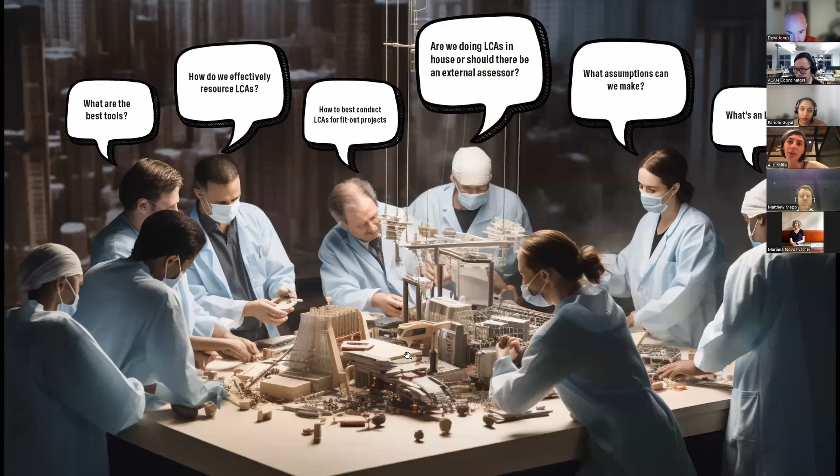We are looking to do this by creating an open and sharing network, which is what brings us here today. So today is the second session of our recently launched campaign called Carbon Clinics. Through this campaign, we are bringing together industry experts who will share their knowledge, experience, and woes in the adoption and implementation of conducting whole life cycle assessments in their respective organizations. The aim of the campaign is to bring practical insights and foster greater dialogue between us during the process and towards better standards and consistency in this world of WLCAs.

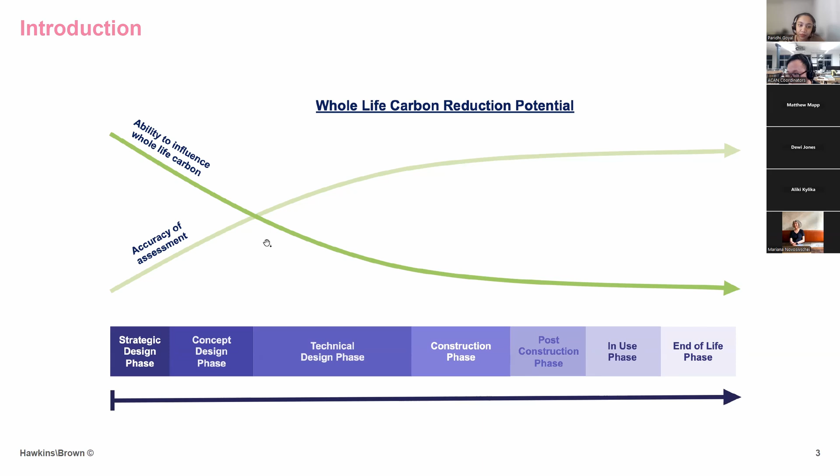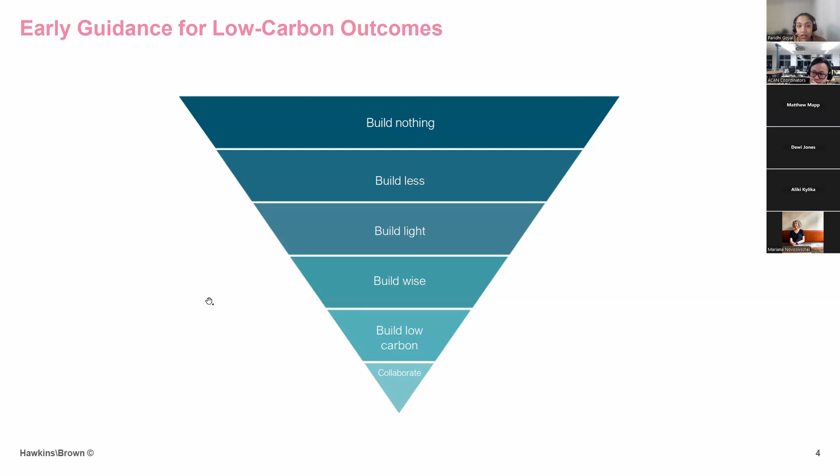At the start of the project, the largest carbon savings can be made through optimizing the brief. So we start with build nothing - do we need to build something at all? Build less - is the brief spatially efficient? Can we use a building or a material that already exists? Is the proposal refined enough? Build light - can we reduce the material volumes by adjusting structural loadings or grid sizes? Build wise - can we minimize materials, balance upfront carbon impact with longer-term replacements? Build low carbon - have we discussed and chosen a low carbon material palette? Build collaboratively - ensure the whole team is involved in designing, delivering, and operating a low-carbon building. Share information openly and be transparent.

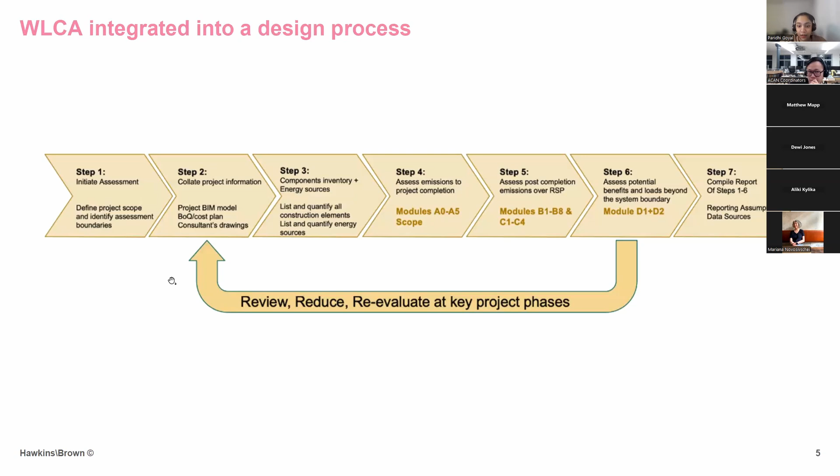The best practice WLCA process should be integrated into project and cost planning from the beginning rather than waiting for a final report. Teams should use WLC data at key decision points. Running a partial WLCA early, just for structural options for example, helps compare materials and designs before making big commitments. The earlier we assess, the more opportunities we have to make meaningful carbon reductions.

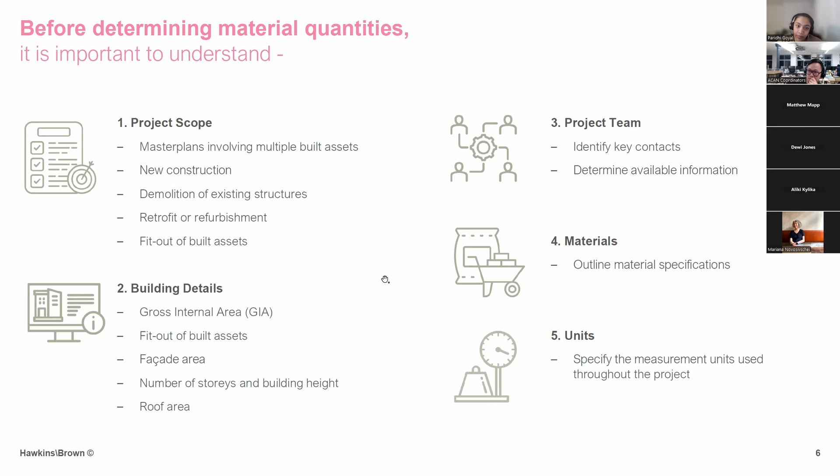Before we start measuring any of the material quantities, we need to get a few things straight. So what is our project scope? Is it a new build, retrofit, or a master plan? What are the building details? What's the GIA? How big is the facade? How many floors are there in the building? Then what are the team roles? Who is providing what data? What are the material specifications? What do we already know and what's still an assumption? Standardized measurement units - consistency is very crucial. For example, if the steel quantities are measured in tons, that unit should be used throughout the project to maintain data integrity.

Before we can calculate carbon impacts, we need to define a few boundaries. Are we measuring upfront embodied carbon or whole life carbon? Which data sources are we using - is it generic or is it manufacturer specific? What units are the carbon factors in? Because having that consistency is key. And don't worry if these terms sound a bit technical at the moment, we'll go over them in more detail shortly.

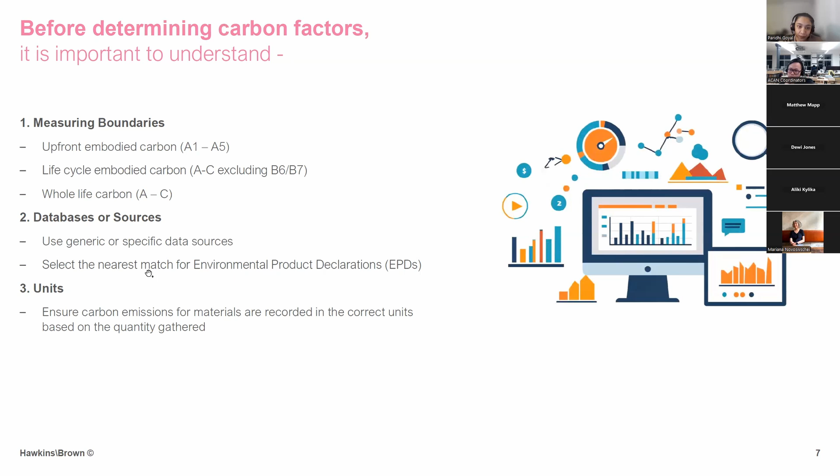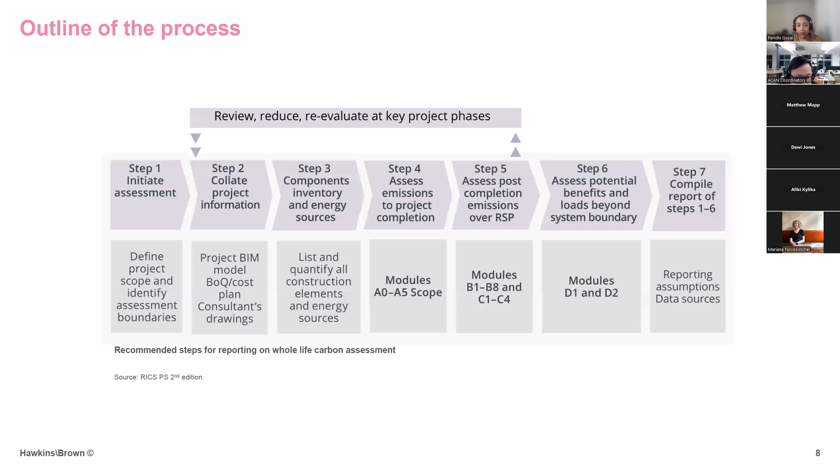The whole life carbon assessment process follows a structured methodology aligned with RICS professional standard second edition. The first step is the initial assessment, which defines the project and project scope. Then step 2 is collating the project information, be it via project BIM model, BOQ, or cost plans. Then we go to components, inventory, and energy sources, and listing the quantities. Then there's assessment of the project till completion, and from there we start with our carbon assessment from modules A0 to C. After that, we have step 7, which is reporting.

So how do we set carbon targets? There are several industry guides we can use for benchmarking. RIBA 2030 Climate Challenge sets out targets, actions, and methodologies. LETI provides detailed guidance on low carbon design, and we now also have UK NZCBS, which is the newest standard. These documents give us a good starting point for setting performance expectations.

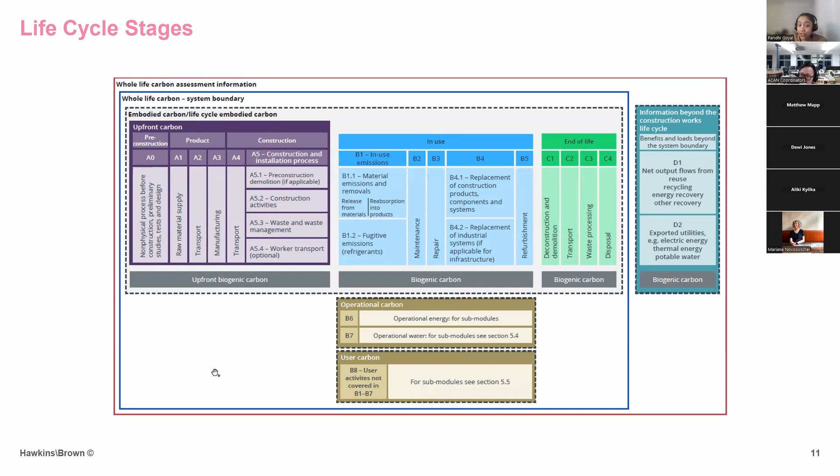Now we'll discuss the initial considerations before conducting an LCA. The project lifecycle stages outlined in the RICS Professional Standard Second Edition are based on the modular structure established in standards such as EN 15978. I'll delve deeper into this module in the upcoming slides.

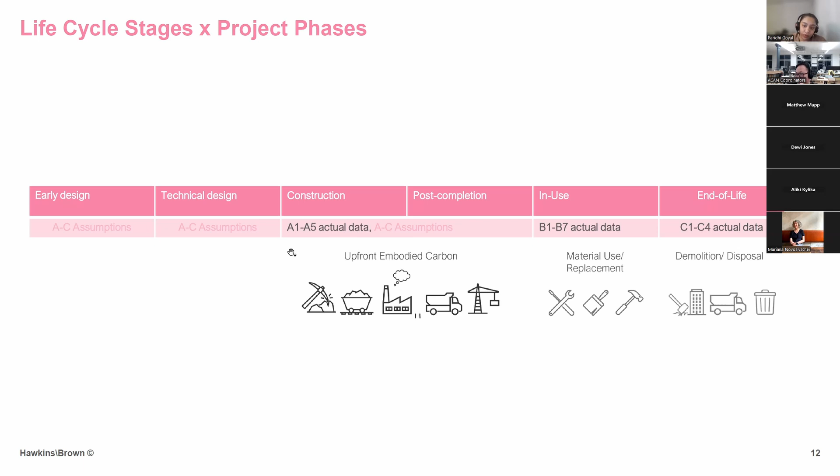As the project progresses, our WLC estimates become more refined. During the early design phase, A to C are largely based on assumptions. As the project progresses, the information becomes more refined, and by the construction phase, you have actual data for A1 to A5 and so on.

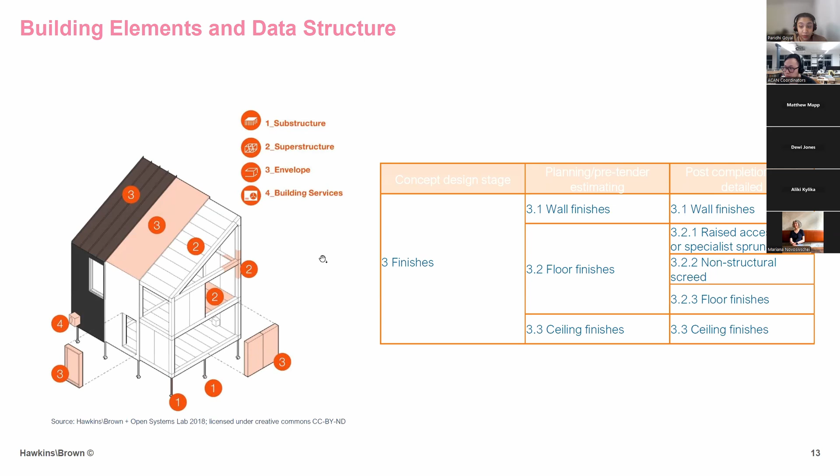All buildings are made up of different elements: substructure, superstructure, facades, services, finishes. As the design progresses, we get more detailed material breakdowns. By practical completion, we have the most granular data, as you can see in the table on the right.

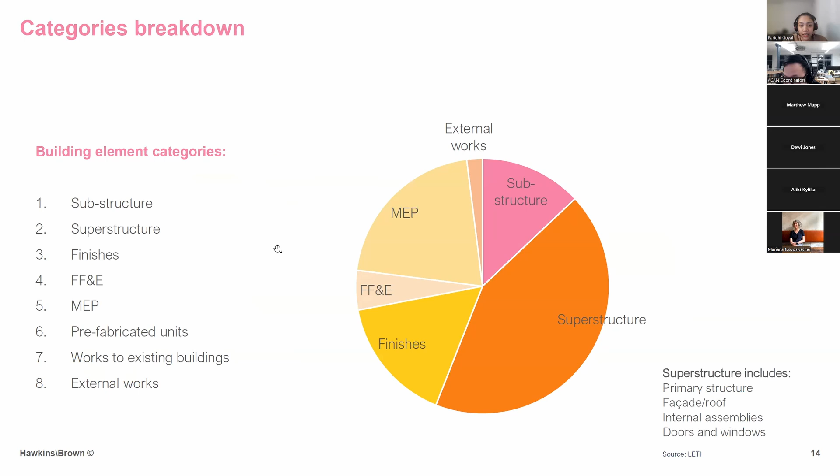The reference study period is the time frame we use to assess the in-use emissions while the building is in use. In the UK, the standard is usually 60 years, but in some European countries it's also 50 years, so be careful when comparing international data.

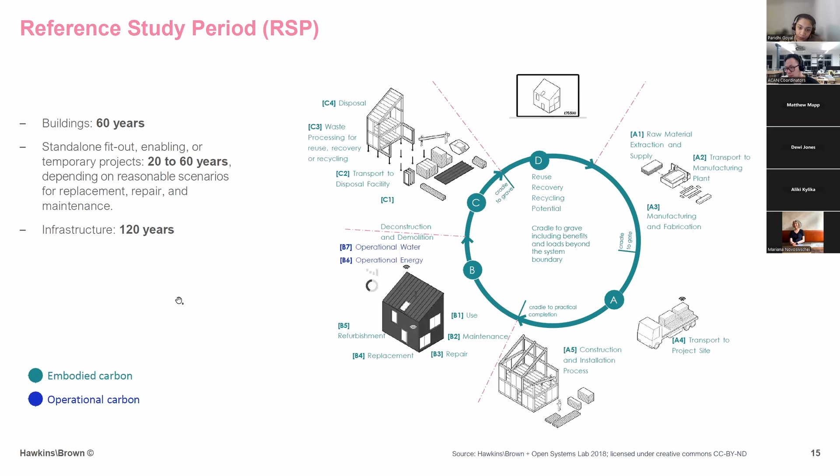When collecting material quantities, BIM models, BOQs, and QTOs are the key data sources. We'll go into more detail about these in the upcoming slides.

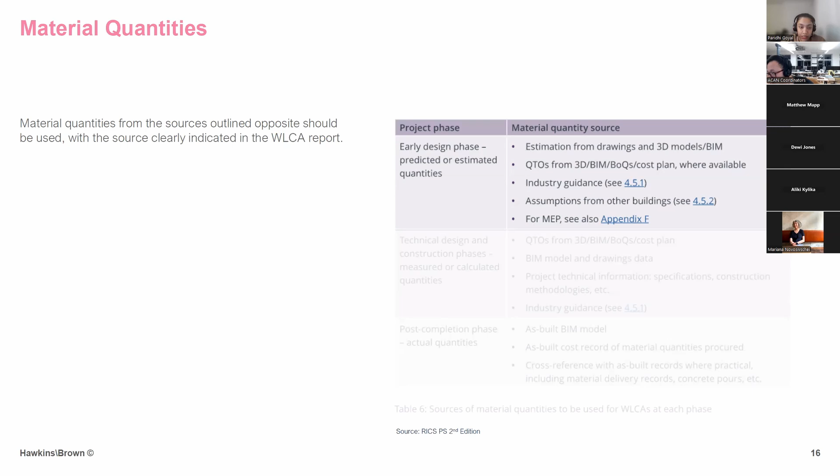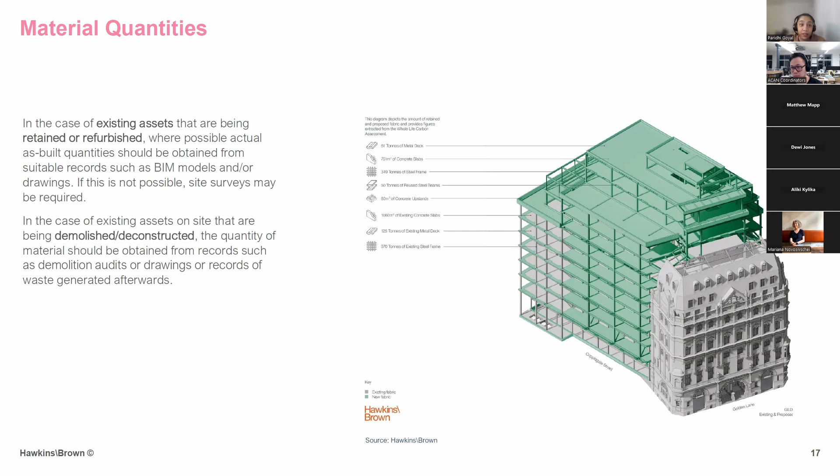If there's an existing building on site, it's important to take this into account as early as possible and try to get hold of some as-built quantities. You should talk to your project manager or client and get the pre-demolition audit commissioned, as this will give you a fairly accurate representation of the material quantity and specification, and will also be useful for any circular economy assessments you may need to do, if it's GLA referable, for example.

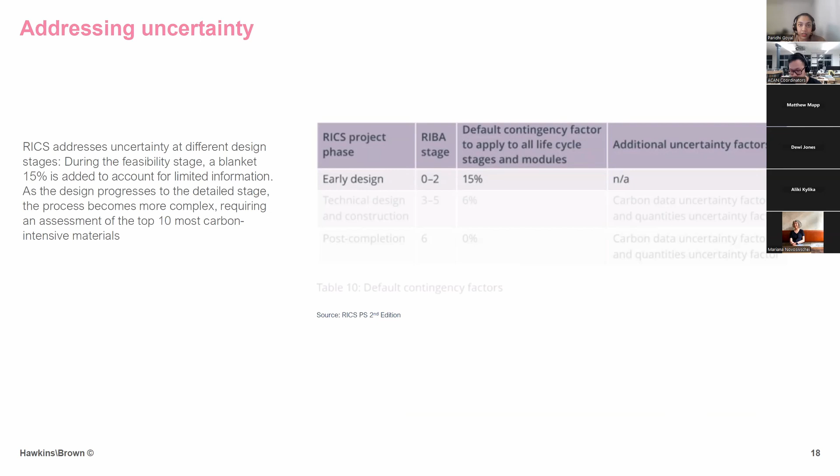In an early stage assessment, we don't have all the details yet, so RICS accounts for this by adding a 15% buffer during the early stage assessments. As the design progresses, this uncertainty changes, and it is refined by focusing on the top 10 most carbon-intensive materials.

Another key aspect of calculating carbon is the use of databases, which fall into two categories: generic, like ICE, and supplier-specific, like the EPDs.

The generic data is material-based, not product-based, and so is preferable to use at the early design stages. The commonly used free and generic database is the ICE, that is Inventory of Carbon and Energy by Circular Ecology. This gives us the data for A1 to A3 only, which is just the manufacturing of the material.

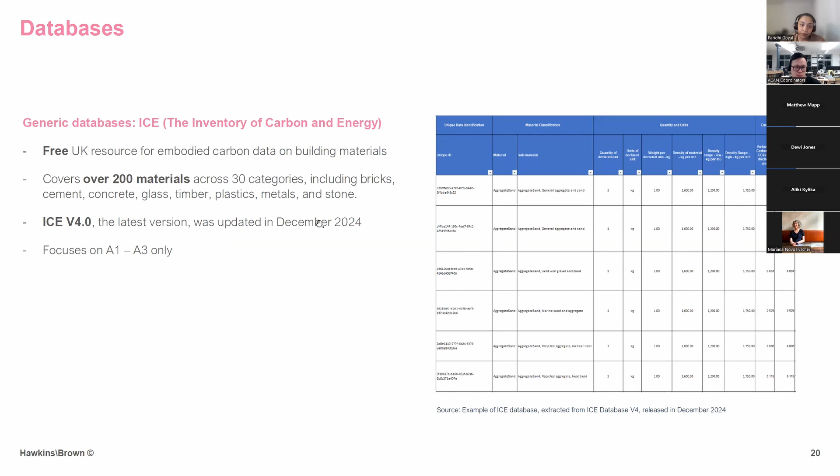When carrying out the LCA, environmental product declarations, or EPDs, are the key sources of data. There are a few different types of EPDs, each with different levels of specificity. First, we have collective EPDs, which are industry-wide and represent an average across multiple manufacturers. These are useful in early stage assessments when you haven't yet specified a particular product but need a general understanding of material impacts. Then there are manufacturer-specific EPDs, which provide data for a particular brand, but may still cover a range of similar products rather than a single one.

Finally, the product-specific EPDs are the most detailed, covering a specific product from a specific manufacturer. These are most relevant at the later stages when you've made a final material selection and need the most accurate carbon data for your LCA.

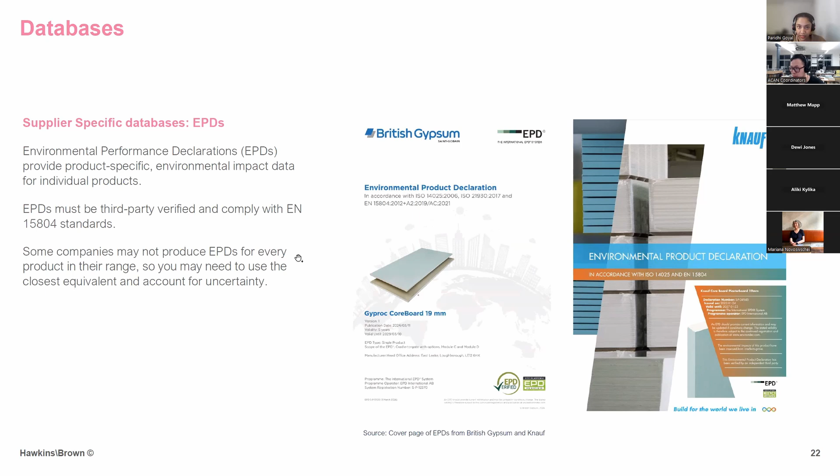These EPDs must be third-party verified and comply with EN 15804 standards. Some companies may not produce EPDs for every product in their range, so you may need to use the closest equivalent and account for uncertainty in the early stages.

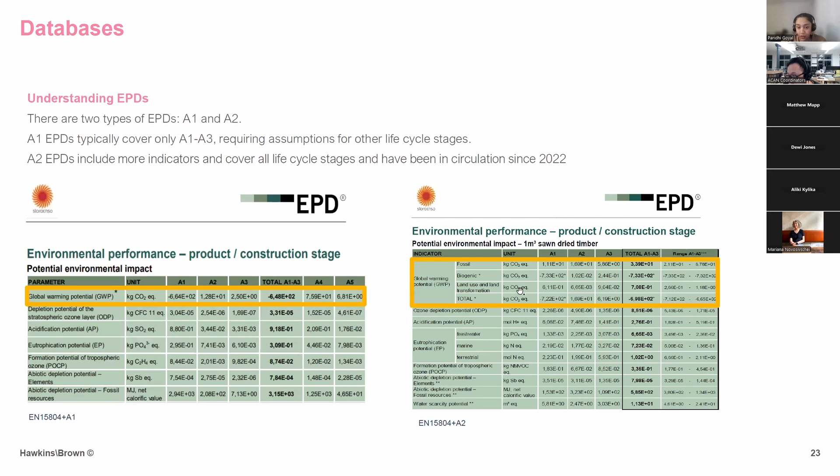EPDs can also be classified as A1 and A2. A1 EPDs typically cover only A1 to A3, requiring assumptions for the other life cycle stages, while A2 EPDs include more indicators and cover all life cycle stages, and they have been in circulation since 2022.

When reviewing your EPD, we need to focus on the GWP. Even if the EPD includes A to C data, it's important that we consider the RICS default figures for early stages, as RICS has its own methodology and assumptions. Ensure that the declared units are aligned, and remember that EPDs are usually harder to obtain, so we have to talk to the manufacturers and stay in touch.

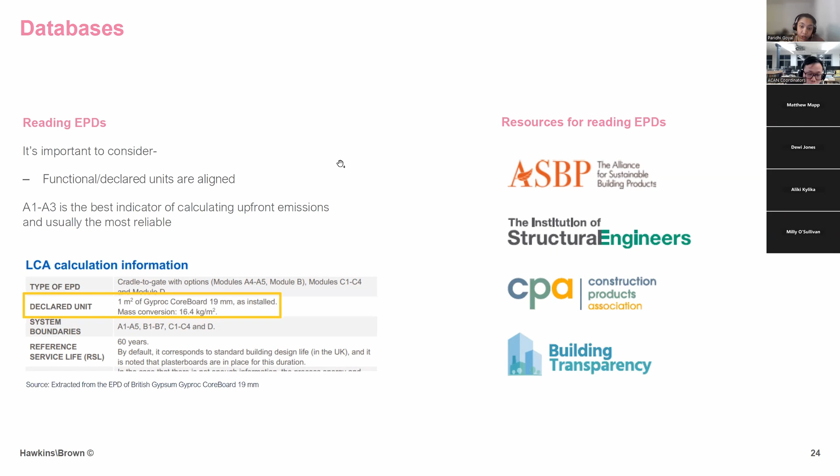On the right side are a couple of resources that can be used to understand how we can read EPDs.

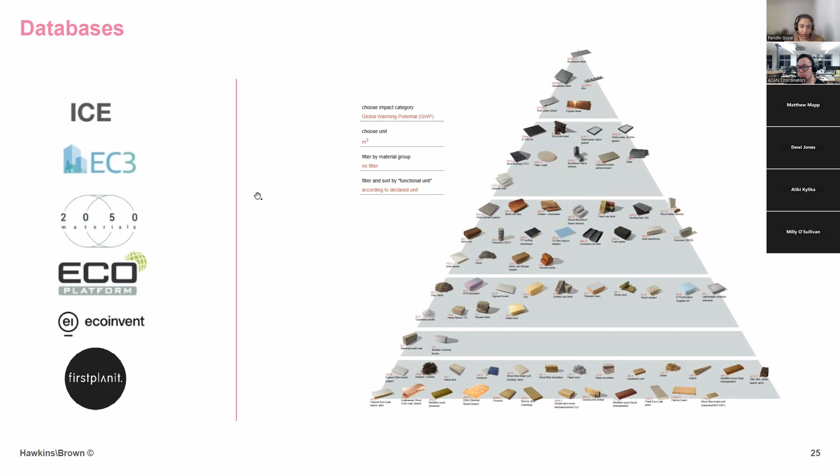Now we'll talk about early design phase inputs.

At the early stage, it's very important that we define the purpose of the assessment and conduct an optioneering analysis, which involves quick preliminary calculations about considerations we make during early stages, like typical structural bays. We also need to be aware of material carbon hotspots and identify key areas that could have a higher carbon impact, so we can start creating carbon reduction strategies accordingly.

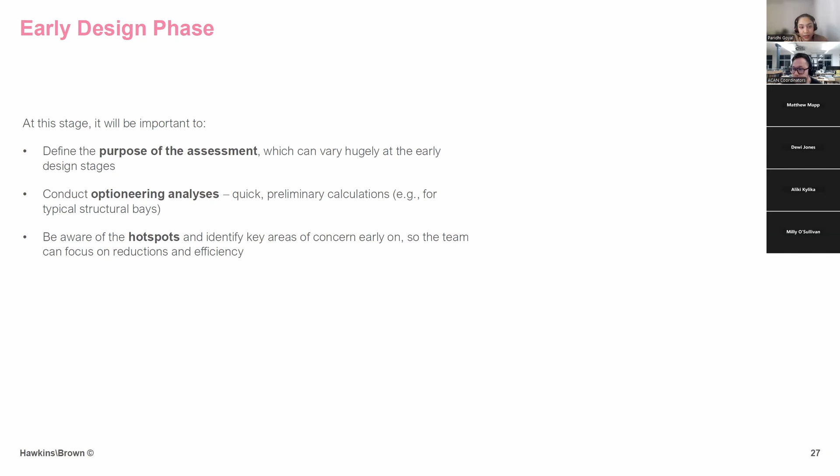Before we start the analysis, it's important to understand how we collect the data. The most common methods are RFI forms, which are request for information forms—I'll go into more detail in the next slide.

Then we have the Revit model, which provides detailed material quantities or takeoffs, usually in a spreadsheet format. The main advantage of using a Revit model is that it gives you precise quantities based on the actual model. However, if the model's components or assemblies are not accurate, the quantities might not reflect the real requirements, so it's crucial to cross-check the data with the BOQs for accuracy.

BOQs, or cost plans—when using these, ensure that all quantities align with the units you've assigned, as having that consistency in units is very crucial. Always review carefully and ask questions if needed, and go back to the BOQ consultant.

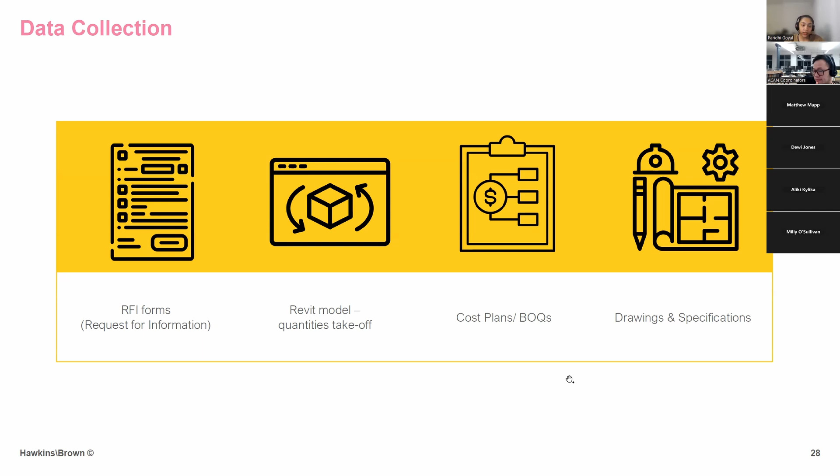Also consider the recycled content. Concrete and steel often have some, and the specification for that should be noted. All of these can be interrelated, so you can always cross-verify any information you've received from your Revit model with the BOQs, the RFI forms, or even with the drawing specifications you have.

This is an example of an RFI we use here at Hawkins Brown. An RFI can be issued to gather quantities from the relevant consultants.

You need to first identify consultants—usually the design team, landscape, MEP, structural and civil engineers—and determine the specific information needed for the analysis, including the data structure and preferred units. Establish the deadline for receiving the information to ensure the analysis can begin according to the project's timeline.

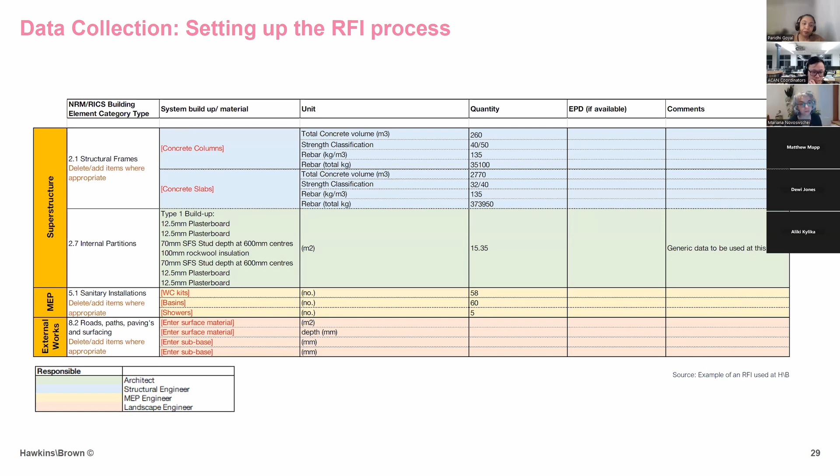At this stage, typically only structural strategies or facade buildups are available. So typical bay studies for horizontal and vertical grids should be conducted at concept stage for different material arrangements, to determine the impact on total embodied carbon for each framing arrangement.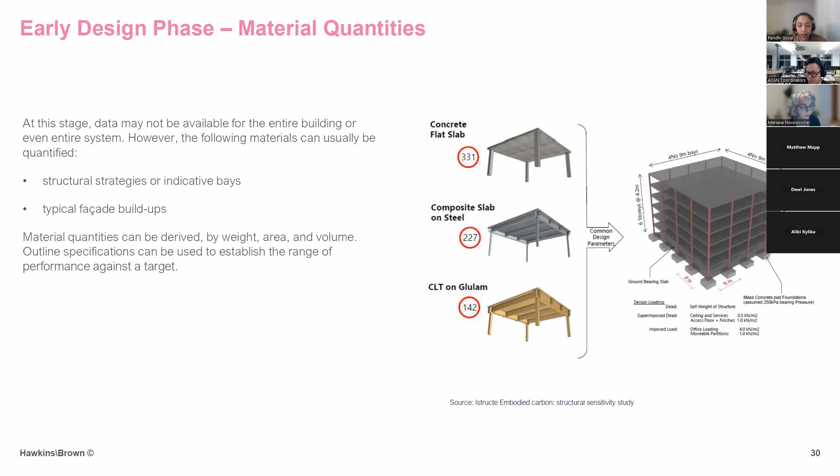Here you can see a typical office breakdown showing the impact of each element category. The facade has a significant impact, making it one of the elements that should be addressed early in the design phase. This highlights the importance of making conscious choices for facade elements from the outset.

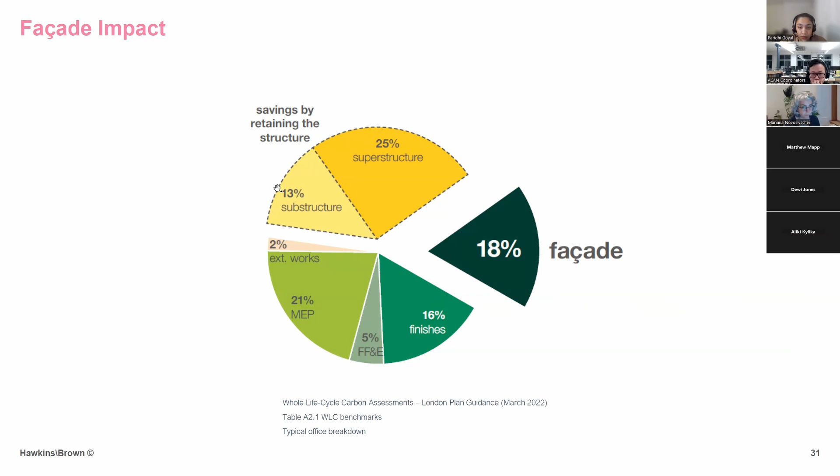So now let's look at this case study, Golden Lane. It's a major office retrofit near Barbican. The project keeps 96% of the structure while adding 4 stories, all without foundation strengthening. The client committed to sustainability and wants it recognized as net zero under the UK GBC framework. I want to show you this to demonstrate the importance of delving a bit deeper into systems at this stage.

So now here we are looking at cladding options with the architects. We expect GRC to have lower emissions than aluminum. However, once we factored the steel support structure, the carbon impact was almost the same. This was mostly because although our GRC itself is low carbon and lasts a long time, the proposed buildup required a lot of steel framing to hold it up.

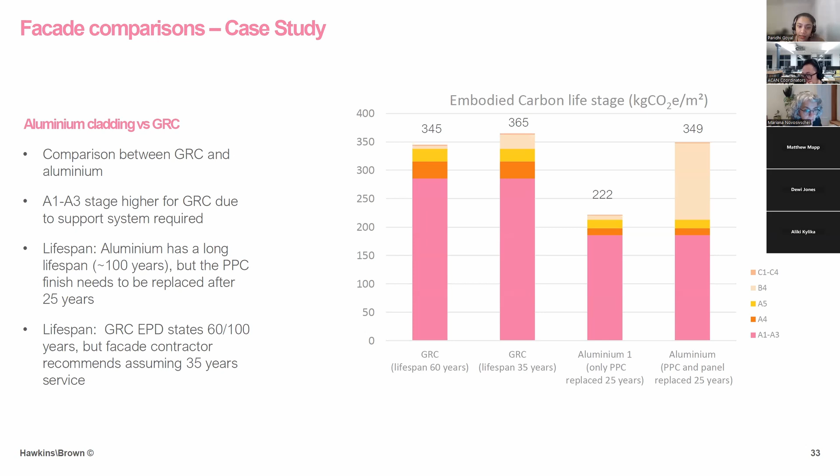So when we look at the material breakdown here, the steel supports for the GRC stand out as the biggest carbon contributor. So if we had reduced the amount of steel or ensured it came from recycled sources, the GRC would have had a lower carbon impact than the aluminum one.

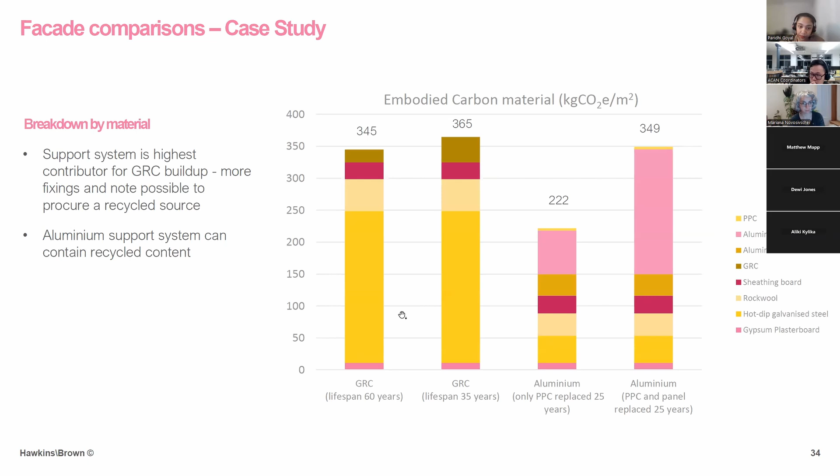So here you can see how we can make assumptions using benchmarks. Key assumptions are needed for internal finishes, services, FF&E, or external works. We can use industry benchmarks that are already available, like GLA, BECD, or past projects or team expertise, whatever is easily available. Step 1 is to source that benchmark impact per meter square GIA from whatever benchmarks you have. Step 2 is you work out the carbon impact of the element separately for each module by multiplying the benchmark impact by the area of the system, then dividing it by the floor area, the GIA. That way you can assume the total carbon impact of that system.

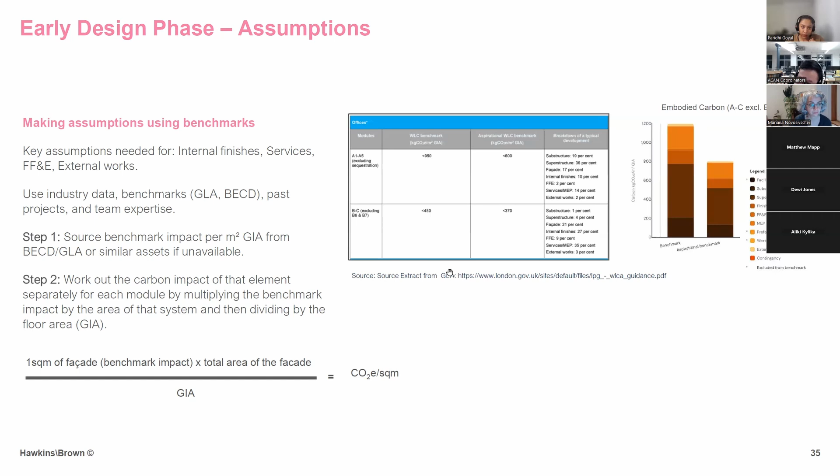The embodied carbon of MEP is also quite challenging to estimate at an early stage. If you think about it, there are thousands of components in a building. There are documents like CIBSE TM65, which help with measurements, and also the RICS MEP takeoff spreadsheet. You need to engage with your building services engineer early and maybe use some simple rules of thumb to practically reduce carbon. So naturally ventilated buildings naturally use less materials. Think about simplicity of the plan and try to limit duct runs generally.

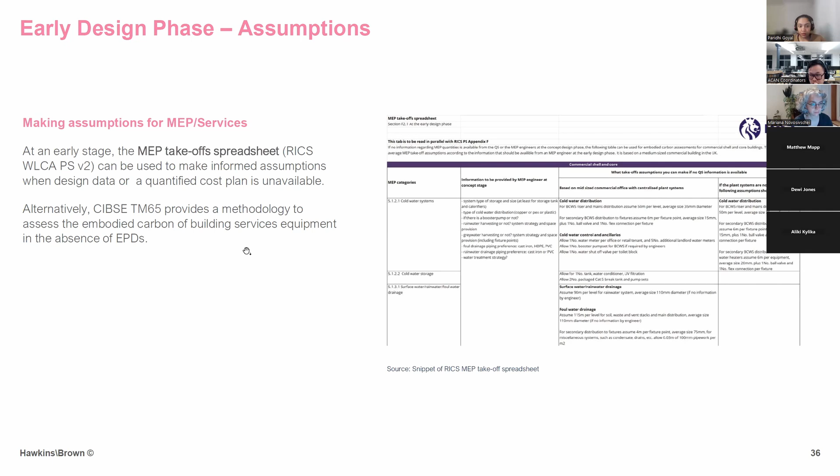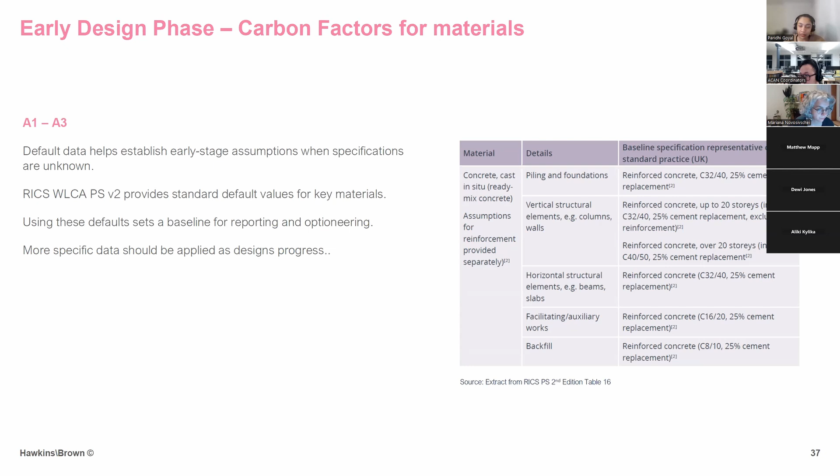A1 to A3, as you may know, is the product stage. That includes raw material extraction, supply, and manufacturing. RICS has a lot of useful guidance to help with early stage assessments. It helps to fill the gaps with assumptions. Quite often, you won't have the specification for a lot of your materials just yet. So there's a default specification of materials that covers things like cast in situ concrete, steel, timber, MEP products, facade buildups, and a lot more.

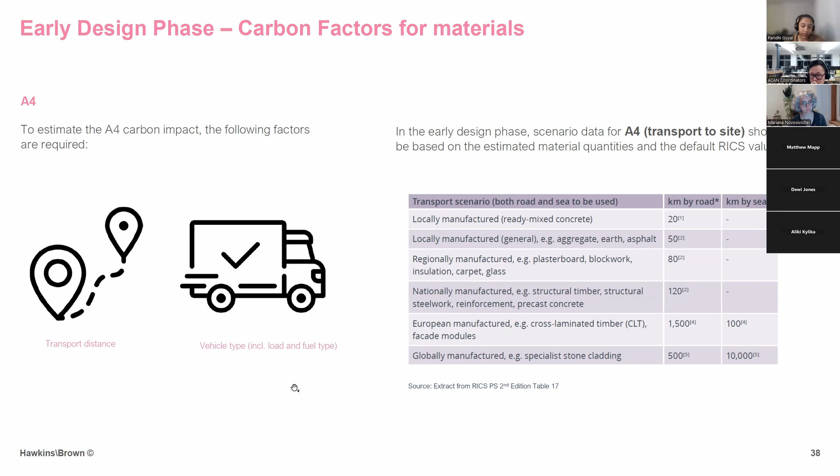The A4 module measures the emissions from the transport of goods from the factory to the site. So the data you need to put into your tools is normally the vehicle type and the distance traveled. Again, RICS has early stage assumptions that you can use here, as you can see in the table on the right.

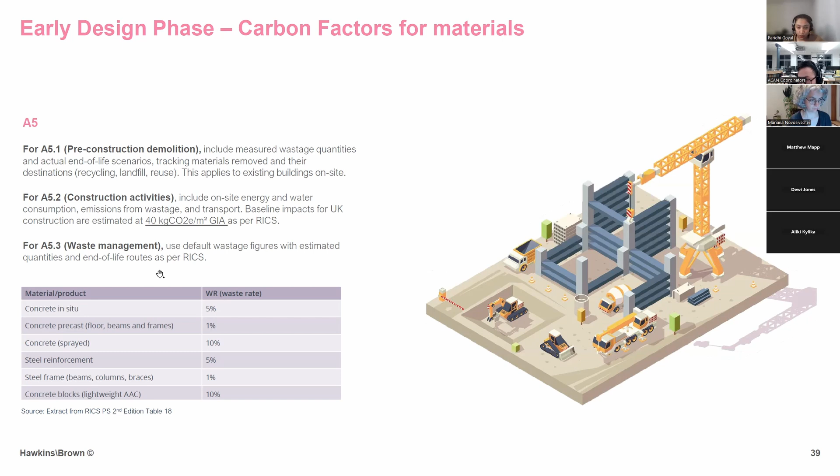The A5 module is the emissions from the works on the site during construction. As per RICS version 2, it is divided into A5.1, which applies to deconstruction or demolition of the existing building asset. If actual figures are not available, a standard assumption for the UK of 35 kilograms CO2 per meter square should be adopted. A5.2 is construction activity impacts, including impacts from any construction activities and installation processes on site. As per RICS, the baseline impacts for UK should be estimated at 40 kilograms CO2 per meter square GIA. Similarly, A5.3 is waste management on site, and the default figures as per RICS are in this table.

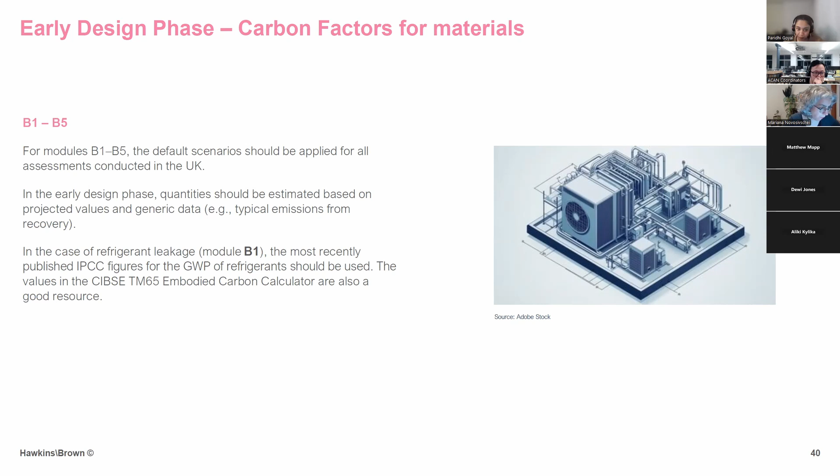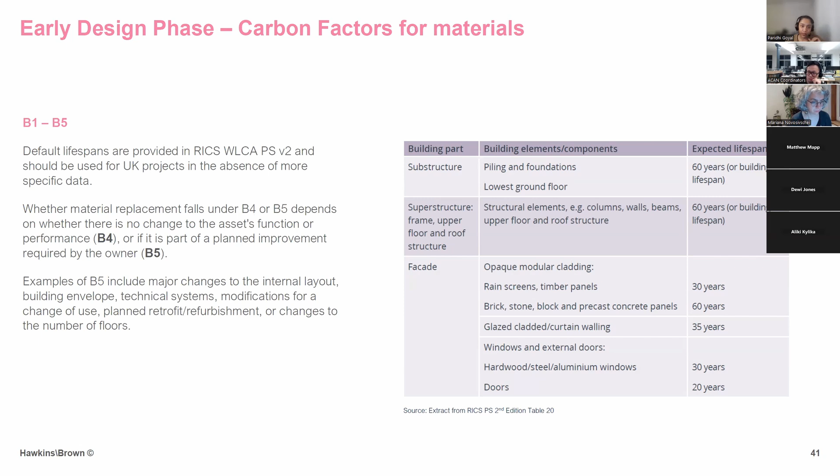B4 covers material replacement, which can have a very big impact, especially if certain materials don't last long. That's why predicting how long the materials will last is also important when calculating replacements throughout a building's lifespan. RICS gives us default figures and guidance for each material's lifespan, as you can see in the table on the right.

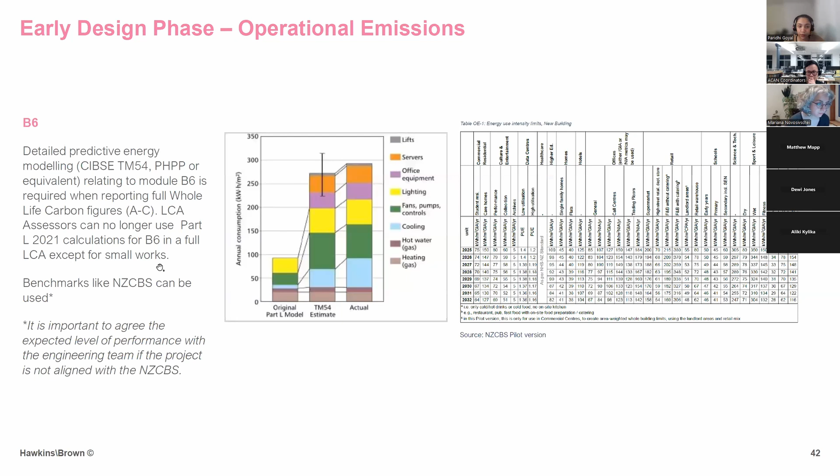At an early stage, you may not have the model for operational emissions, so you have to start consulting your building services engineer. As design progresses, use predictive energy modeling like TM54 or Passive House for operational emissions, not compliance models like Part L, which overlook non-regulated energy like TVs and fridges. CIBSE TM54 calculations may not be available early on, but benchmarks like NZCBS can be used. Just ensure you align the expected performance with the engineering team, because it's a best practice benchmark, and not every consultancy or engineering team would be going forward with this.

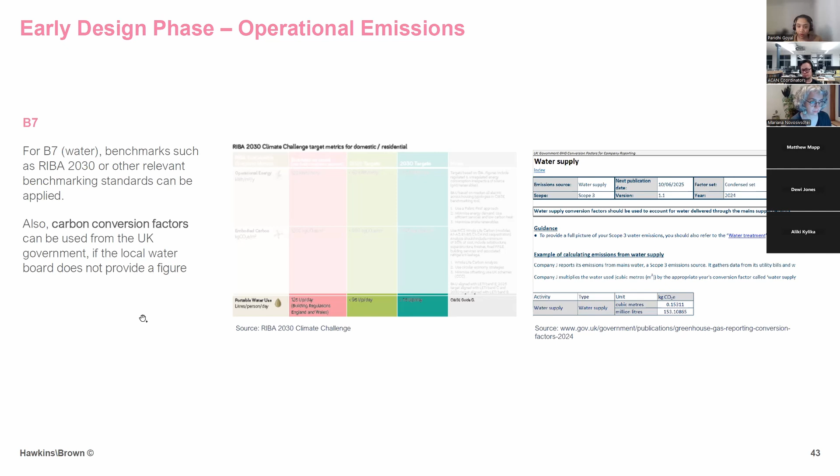For B7, benchmarks such as RIBA 2030 or other relevant benchmarking standards can be applied. There are also carbon conversion factors from the UK government, mentioned on the right, if the local water board does not provide a figure.

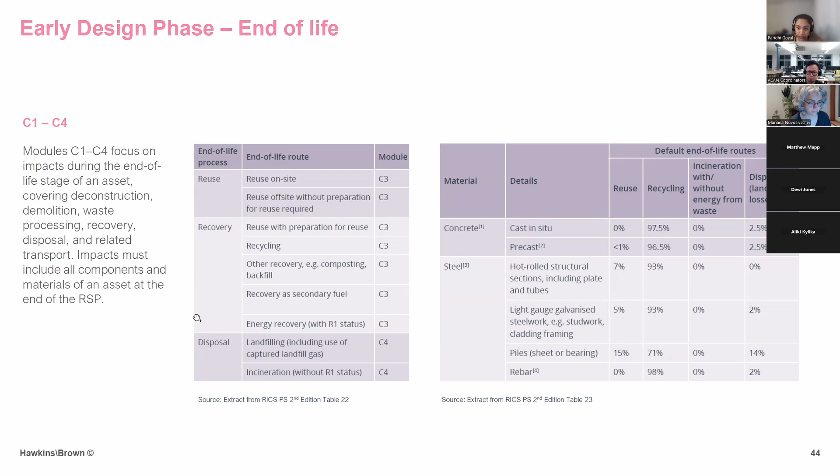At the end of the building life, materials are either reused, recycled, or sent to landfill. This table outlines the end-of-life processes as per RICS, the different routes for each process, and the corresponding life cycle modules and their outputs.

With this, we've come to the end of the early design phase inputs. To conclude: first, think about why you're doing the assessment—reporting purposes or driving down specific building elements. Start early. The best time to make carbon savings is before any major design decisions are locked in. It's important to figure out the hotspots and focus on what you can reduce.

Use benchmarks for setting targets. For default assumptions at early stage, RICS is your Bible. Focus on key carbon drivers like structure, facades, and MEP systems, which have a massive impact. And lastly, collaborate—carbon reduction is a team effort, not just the job of sustainability consultants. Thank you.

Thank you very much for having me along to this session. It's a pleasure to talk to you about the work we've been doing on pre-construction and post-construction whole life carbon assessments. Welcome to the Wild West of whole life carbon, where the rules go out the window—it's a very difficult phase of getting information and establishing your final position. There are very few rules and regulations to this stage. I wanted to talk you through what we've been doing at SWECO over the last five or six years to really get to the bottom of this and understand how we navigate through the late design and construction stage processes to get to the answer we want at the end of the project.

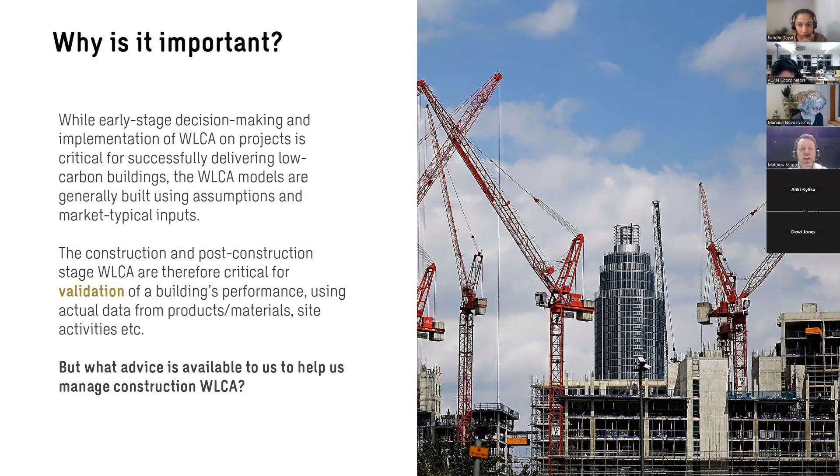Paridhi talked quite a lot about the assumptions and information used during early stage whole life carbon assessments. But when you come to construction, you want to use actual information from the project, from the actual products and systems used in the building. It's really important that we do post-construction whole life carbon assessments for validation purposes—wherever we set a design, it needs to be validated at construction with the actual products and materials that go into the buildings we construct. The big question is: what actual advice is out there to help us strategically implement whole life carbon assessments at construction stage? We'll have a quick look at that now.

So Paridhi has introduced us to RICS, the framework, the elements that we talk about and look at. But when you're looking at the construction phase, all you've really got is a couple of statements. We expect you to do a construction phase and a post-completion stage whole life carbon assessment. You are expected to use this type of information to deliver this assessment at this stage - not especially helpful when it comes to actually conducting one and navigating through the construction process.

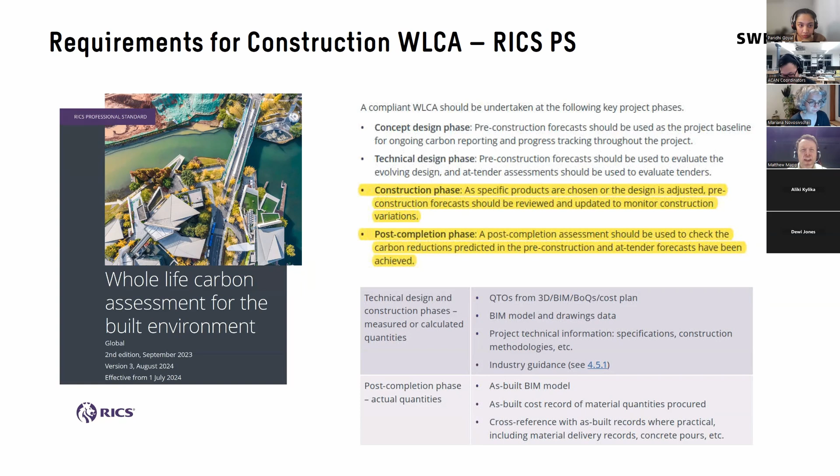On the next slide, what we'll also see is the GLA. They do a very similar thing. When do you need to submit a whole life carbon assessment? Well, you need to submit one at post-construction, not how you do it. But we also see drivers from planning. There's a recent City of London project, an example on the right-hand side at the bottom, where there are conditions associated with undertaking whole life carbon assessments. So really, that's the extent of it - those are the requirements to do and undertake whole life carbon assessments at post-construction.

But there's no real gauge of what do you actually do. How do you collate that data in the first place? What are the methods and processes you have to go through? How do you engage with contractors? How do you physically get that information?

It is, in my experience, daunting and extremely difficult to gather that information, particularly with an educational piece around whole life carbon. We as designers, architects, engineers, seem to have got to grips with this, particularly in the London nucleus. But within the construction world, particularly within the trades and subcontractors, it's very difficult and problematic often to get this information because the level of education is not there in what needs to be provided. They don't understand RICS, they don't understand the elemental breakdowns of carbon. So I'll talk to you in a bit about the kind of language change that we expect and how we navigate that process.

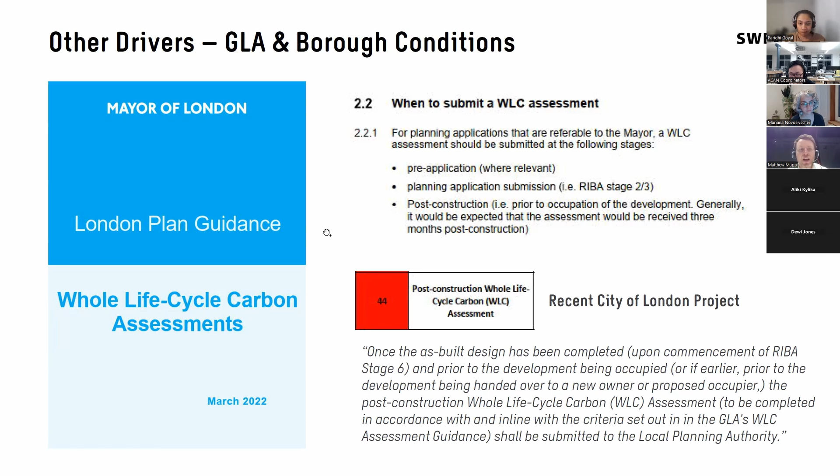Preparing for this is really, really important. One of the things that we do at SWECO is - early on, we were accountants, doing accountancy exercises, doing a carbon assessment and providing our clients with reports. We then moved into consultancy, where we understood what the key drivers were, where the big impactors were, and how you go about delivering low carbon opportunities within different building elements and systems. We've moved into a phase now where most of our work is carbon project management.

Understanding what you do and when you do it at specific project stages is so important, and that is never more important than when you're preparing for a construction stage assessment. The things you do in the build up to that, the level of engagement you have, the people you talk to, the information you gather - it's so important in the setup process, delivery, and getting the right outcomes at the end. That really starts as early as RIBA stage 3 for the preparation of this type of work, where we look at cohesive specifications - and that's one thing I'm going to talk to you particularly about today.

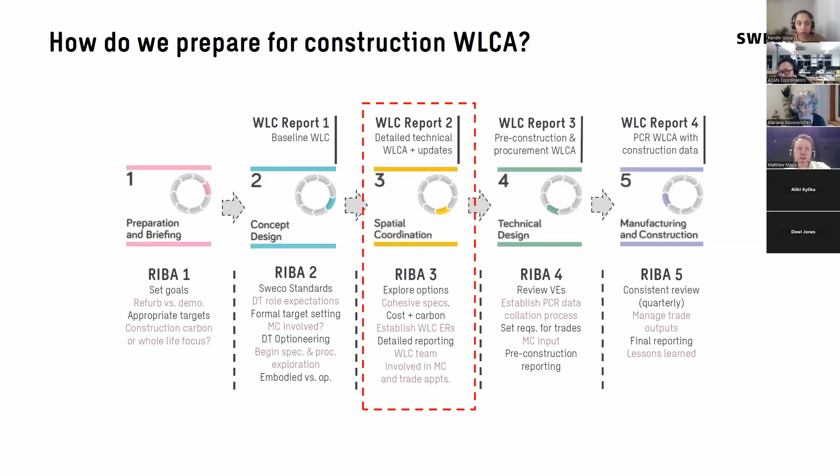Next slide, please. So this is an example from 2 Aldermanbury Square. What I mean by cohesive specification is having the conversations - and so much of this is not about technical skills, it's more about softer skills. How integrated is your carbon information? What are your targets? How are those project targets reflected in project specifications? How are the things you've said and agreed with your client, with the project engineers, with the architects reflected in your specifications? Because the specification documents are often the documents provided as part of any tender process, their expectations and requirements for the contractor to provide information.

Yes, you can obviously submit a whole life carbon assessment as part of that, and they can read your whole life carbon assessment, but cohesive and back-to-back specifications on expectation, particularly at stage 3, are very important when you're entering a tendering process. You can see on the right-hand side here at 2 Aldermanbury Square, which is a large commercial 43,000 square meter commercial office development in the city, the targets that we had in our carbon report were reflected within the specification - the expectations that we'd had and agreed with the client, and done our early supply chain engagement, were reflected in the specification.

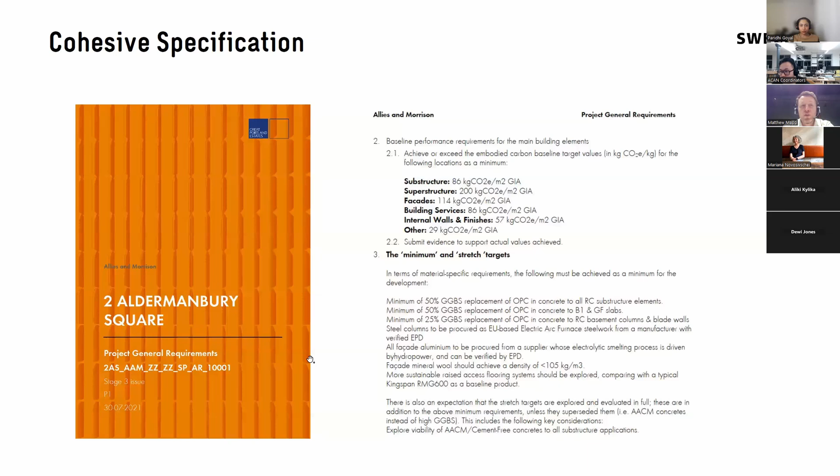But it's not just about having that reflected in the specification, it's about being cohesive across the whole suite of documents that would be presented or provided. On the next slide, we can see another example of that, where this is a different type of specification - the concrete specification, where that's back to back with the assumptions that were within our carbon report, but it's also reflected in the specification and tells them what they were expected to achieve in the concrete specs.

On the right-hand side, you can see an example of facade performance. Within Arup's facade performance specification, they specified a specific type of aluminium that was expected, and critically, the cost plan is back to back with that. When you're making these assumptions and reductions about procuring specific materials, having your costs back to back with that is really important, because it means that's accounted for within your overall project.

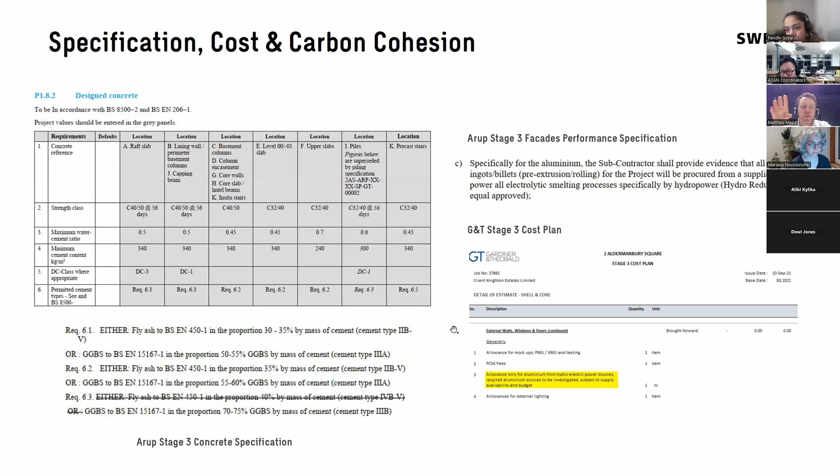This cohesion of specification is so important. So often on projects I see, the whole life carbon assessment sits outside as a boundary element. It's just another document to read, with no cohesion between the documentation you provide, so the contractor will also see it as a side piece, a separate measure, a nice to have rather than something ingrained within the project approach where each part talks to one another. This part of the setup is really important for getting the right answer when you come to the contractor phase.

When I talk about there being no rules, I mean that. There's no real documentation out there to tell you exactly how to navigate the process all the way from stage 3 specification through tendering, through appointment, how those things are split down with the trades, and then how those requirements are distributed to the trades.

From RIBA stage 3, when you come to the main contractor tender, you've got to look at the overall targets and how that target is included. We do a lot of work now on how you make a target contractual. What are the obligations on the contractor to ensure that target is met? How do you then manage that with the trades? Do they have their own separate sub-targets? How do you navigate moving from design speak into construction speak?

This is the most important thing I will talk to you about today: this changing of language between design and construction. If you go to a contractor or subcontractor and start talking to them about building elements and how your carbon is distributed between building elements, they'll look at you like you're speaking a foreign language. They do not speak in that language.

The most important thing we've done at SWECO in the last 5 years for construction whole life carbon assessments is navigating the language change between design and construction. What we do with our design stage models is take that model and port the carbon emissions from each building element into construction packages. Each construction package is assigned to a trade or a number of trades, and each then has its own carbon budget. More importantly, they know what materials and products are associated within our carbon model for that package.

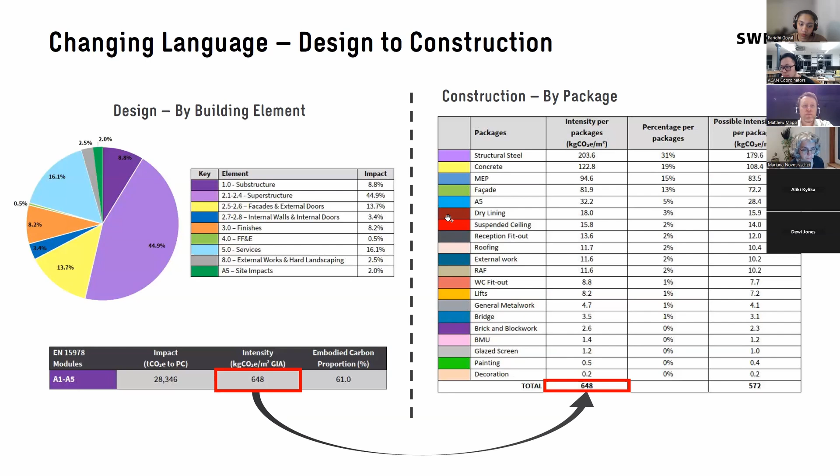Of course, there are other ways of doing this. That's a typical process I've shown you before, where a contractor gets involved in a PCSA at stage 4. We look at their CSA, port that into construction packages, and move on into construction from there. But 105 Victoria Street, a large-scale 60,000 square metre commercial office building in Westminster, had a strapline of always find alternative. We did things slightly different on this project. I think it's still the only project where I've done it this way.

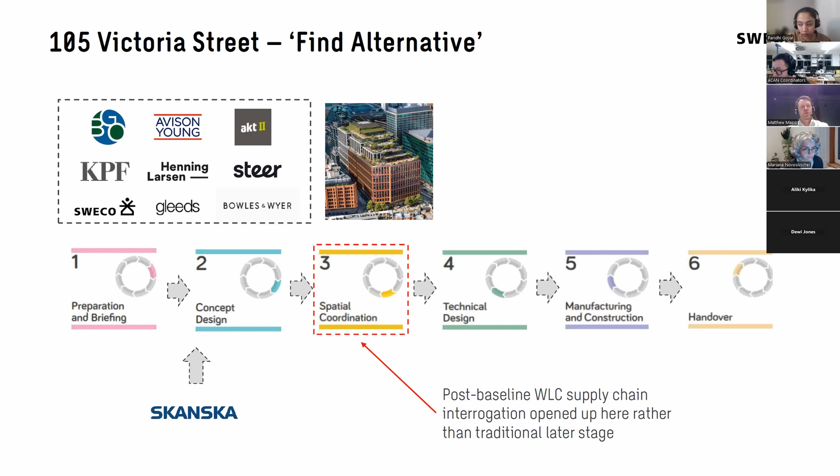On this project, Skanska were involved with the design team at the start of RIBA Stage 2. Therefore, that level of involvement, interrogation, supply chain knowledge, contact with the supply chain and information was there from the start. By the time we got to RIBA Stage 3, we were already doing post-baseline whole life carbon supply chain interrogation, getting that towards a point where in our Stage 4 model, which you can see on the next slide.

There were pros and cons to that. Having a contractor on board much earlier, obviously the whole process became much more contractual. The actual level of information we got, trades changed from one to another as we got into the procurement phase of the projects. So it wasn't a silver bullet.

What it meant was that our client had an extremely good understanding of the spec and also the input from the trades, and how we would control the input, the feedback, and the provision of information as we moved into the construction phase. Ultimately, what it meant was the level of comfort we had in our carbon model at this stage of the process was extraordinary, beyond any other project we've worked on to date.

So that is a potential alternative way of navigating whole life carbon assessments, not for everyone. This is a one-off example in my portfolio at the moment, but an interesting observation of how you can get better data before you even start the construction stage process and integrate that with trades and contractors.

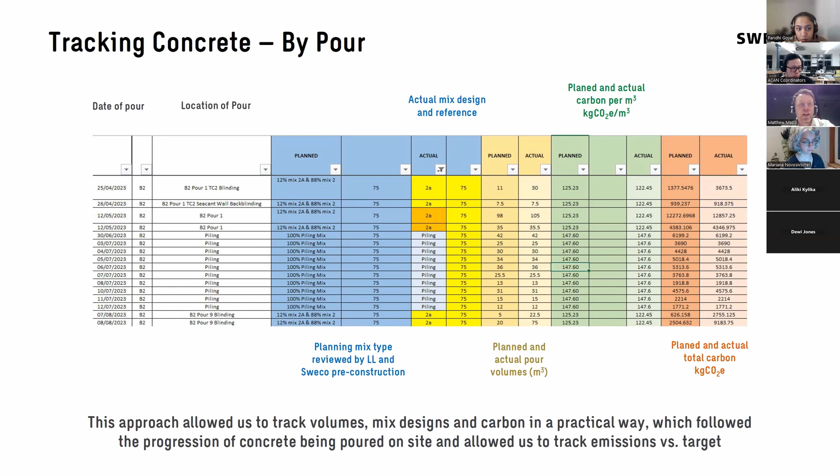This is a pro forma that we now use across our projects to help us understand and track carbon across the construction stages. It was really effective in terms of managing change and also maintaining our performance against the carbon budget.

Facades we again do in a slightly different way. Engaging with the contractors early on is really important. There are new methodologies out now.

The CWCT's How to Calculate Embodied Carbon in Facades provides a really good design basis. That calculation methodology is a sub-methodology under RICS. So RICS doesn't cover everything - there are sub-methodologies in the industry that help you do more detailed calculations of certain specific things.

We had already done the process I've spoken to you about before. So not only had we talked about what the carbon targets were, but those carbon targets were reflected in the documentation received back from the subcontractors. They'd taken those targets, understood what they needed to achieve, and then did their own calculations.

We're starting to see also bespoke EPDs. Facades are bespoke systems, they're not all the same - quite different in component makeup, system typologies, and glazing to solid ratios. Therefore, having something like an EPD to cover facades doesn't work. A facade is a bespoke system on a building, and therefore needs a bespoke approach even at the design stages, hence the requirement for CWCT.

What we're starting to see, though, is that actual EPDs are being produced for facade systems specific to buildings. So there's a way of collating the materials, understanding the carbon impacts, and providing a project and system-specific EPD. That's what we can see here for the facade system at 2 Aldermanbury Square from Scheldebouw, where they broke all this down and provided us with the information.

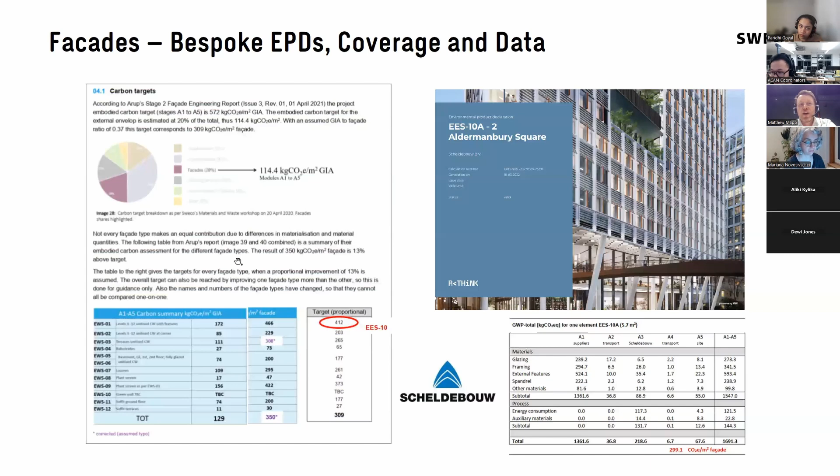And therefore we use the methodology of plus or minus. We've got one EPD that covers the main facade systems. Most of these other facade systems are variations on that typology to maintain the aesthetics of the facade, and therefore you can plus or minus them. Some have different calculations that aren't EPD but use the same methodology. But once you've got that EPD and validated the carbon emissions for each material, it's possible to use proxy calculations to calculate the rest of the facade typology.

So we worked with them bespoke, specific to the typologies on this building, in the language they required, to help them understand the plus or minuses, where we needed an additional calculation because it was quite different, and where EPDs could be used cross-collaboratively to gather information for the facade. That's a more bespoke way of gathering information for construction, working in a language they understand with the codes specific to their procurement and manufacturing.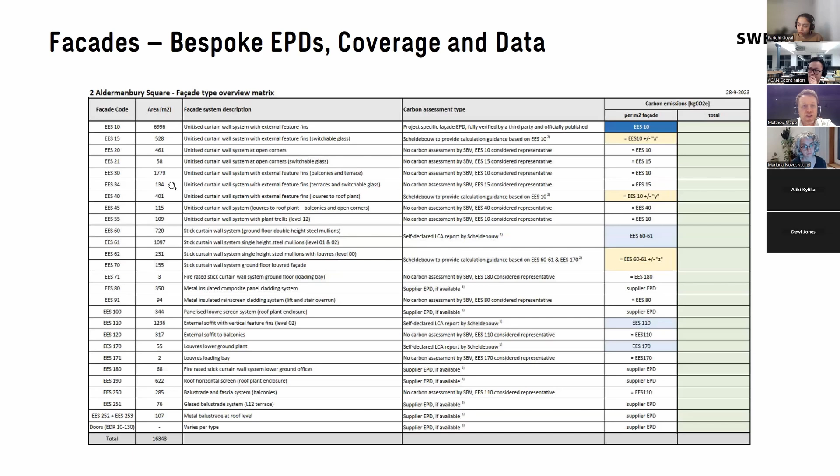Building services is by far the most problematic piece of information you can gather at construction stage. There are hundreds, if not thousands, of different materials within this. There seems to be a feeling within the industry of 'too difficult, don't really want to gather that information.' Where do I stop? Do I go down to hangers, bolts, nuts and connectors in ducts? Where do I start? How do I gather this information?

So often it gets pushed to the back burner and you get all that information at a late stage. But the process of how you actually go through getting some of this information is exactly the same. You might have at the early stages an MEP package, and then that MEP package might split into 5 or 6 different elements. You can see the 7 elements that we've got here on 2 Aldermanbury Square.

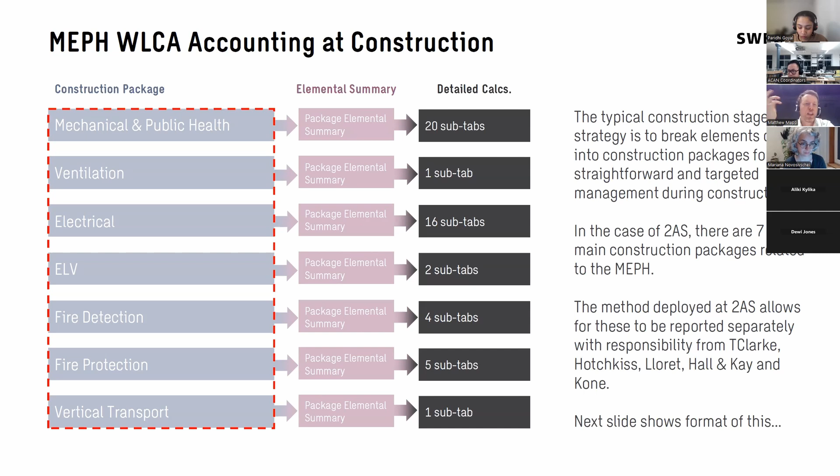Those are the kind of main key construction packages that we have, and we can then report them separately. They can be assigned their trade contractors — in this case, TClarke, Hotchkiss, Lloret, Hall & Kay, Kone. The next slide then shows the format of how this information is then captured.

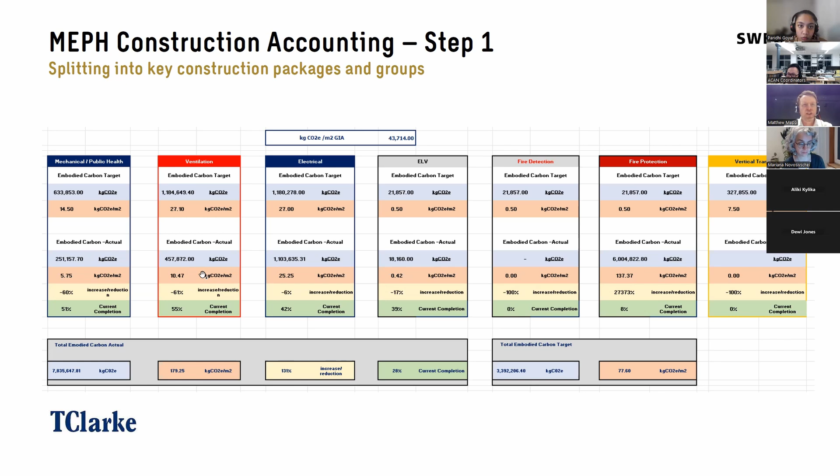Working very heavily with TClarke, we presented a pro forma whereby once those construction packages were known and the information in them was known — because we had that design information in a lot of detail in our stage 4 construction model — you can see how those different things are reported. This is just the front screen, a track and record of information as and when it comes in to the overall whole life carbon assessment.

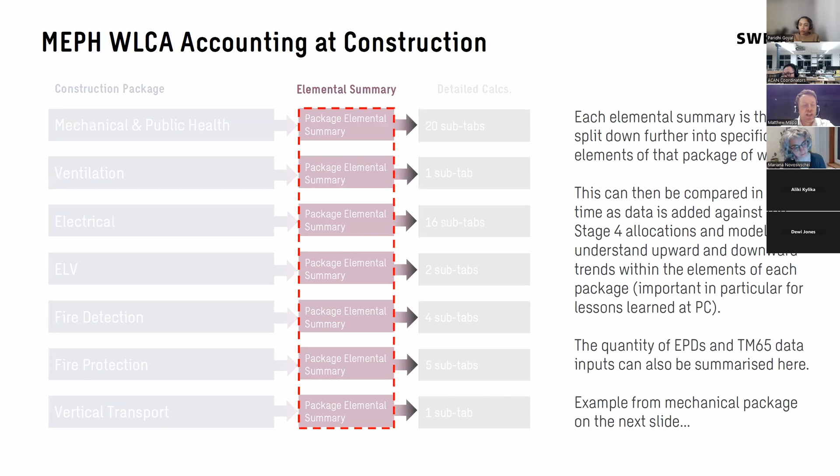For the next slide, we then needed elemental package summaries. Even within those construction packages, there are a plethora of different things and parts that will be connected. On the next slide, we can see all the different types of information — this is just an example of one of those packages that has 15, 20 different sub-elements.

This was actually really quite important and innovative because we could track different parts of that package, see where the carbon emissions were, see how that information was gathered, look at how complete that was, and also compare that against our design information.

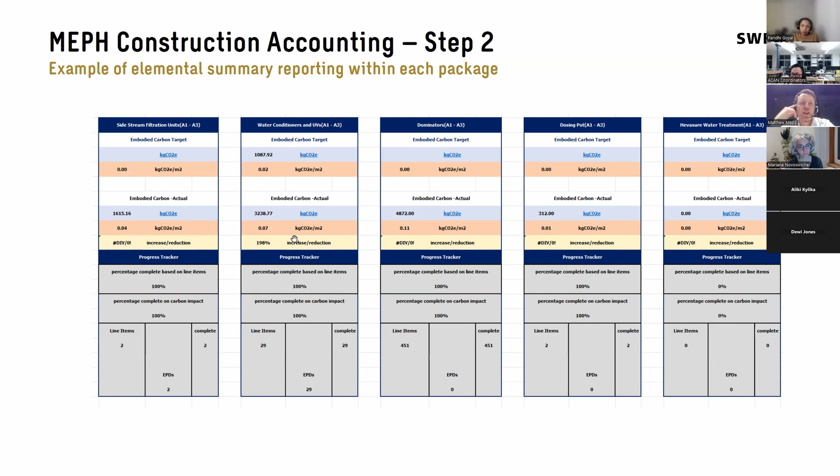The last part of this is the sub-tabs — the detail, the information that's being calculated and collected. On the next slide we can see an example of that. This just goes to show you that information is there, it's available to be collected. This is not a thing where you just can't find that information and can't get it.

The level of detail we got on 2 Aldermanbury Square for MEP was extraordinary, but because it was set up in the right way — because they knew what we'd assumed at construction stage, and they could gather that information the right way, and they knew we were speaking in construction — we weren't just saying give us all the MEP information, we're talking about specific parts of specific packages. Gathering that information in that way was so important, and they engaged really heavily with this.

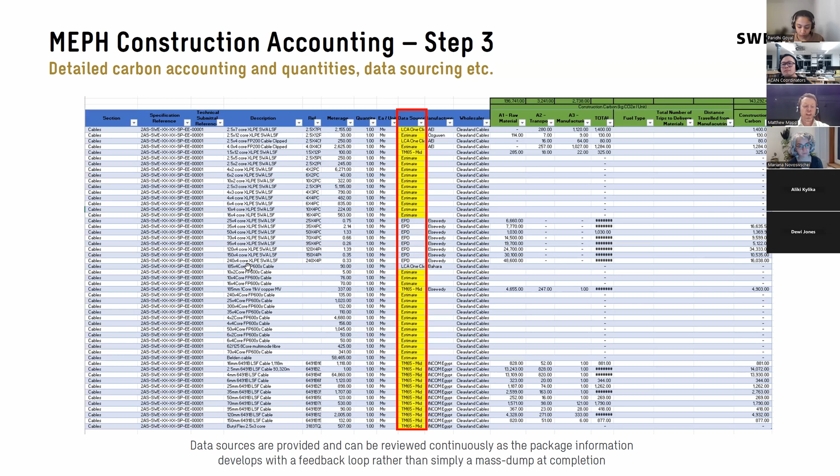The importance of engagement, I think, is really quite key. What all this does from an educational term is that they start engaging with this information process. We start asking them for information like CIBSE TM65, which Pandhi had talked about a little bit earlier on. The manufacturer then gains information.

So they break down their component — let's say you've got an air handling unit and you break it down into its component parts. They then assign carbon factors and can understand how the carbon is distributed within that particular component. Is it in the fans? Is it in the casing of that system?

From that, the manufacturer can explore opportunities to procure lower carbon products and materials that contribute to lower carbon. So you could turn around for the air handling unit and say, wow, 80% of the carbon in my air handling unit is in the steel casing — so is there an opportunity to procure lower carbon materials to reduce the embodied carbon of my product itself? The feedback benefit of this is potentially huge, and we're actually physically seeing that in the market now.

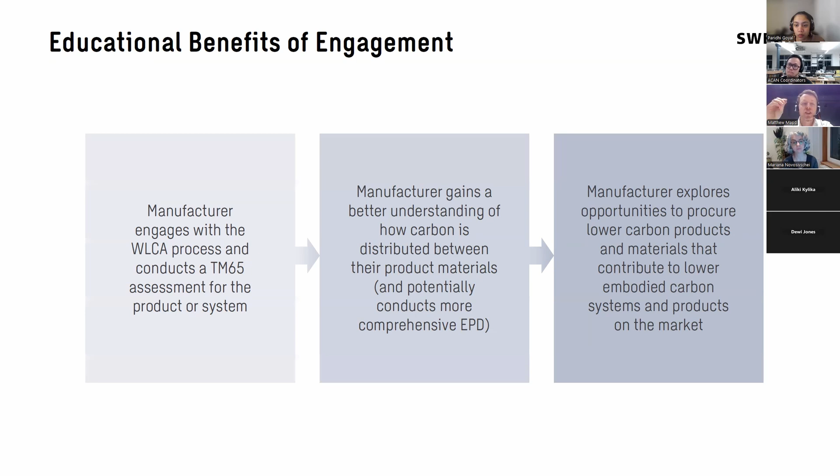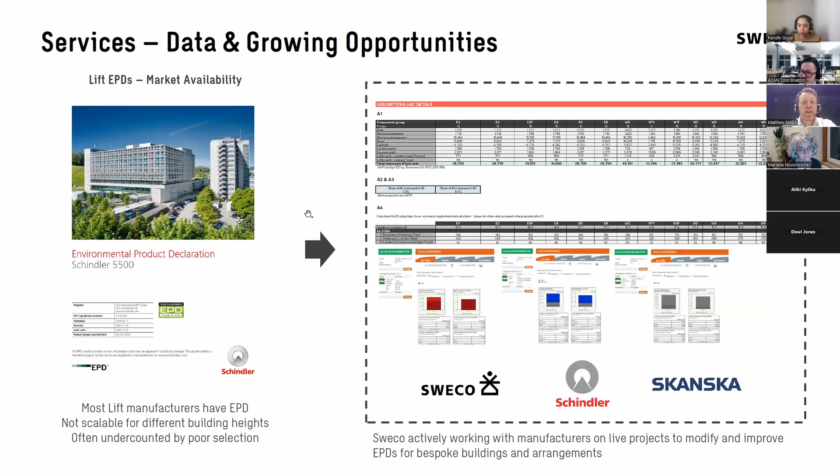And then I think for my last slide is just a summary. So successful construction whole life carbon starts early. You can't start too early, I don't think. Getting those things in the back of stage 2 reports is even a great place to start, just to set out the overall intent of the scheme.

Transferring models from design language to construction language - and I'll say that again, that's the most important thing that we do from going from design to construction. Tried and tested at SWECO for actually delivering on what we say. Trade-specific data collation methods help. A lot of that is soft engagement as well as hard engagement.

Soft engagement, I mean just getting out of your seat and talking to people, understanding how they do these things, how construction actually works, rather than trying to force RICS down their throat and saying this is the only thing that you can possibly do. Getting to know how they procure, how they get that information is absolutely critical to getting successful inputs out at the end.

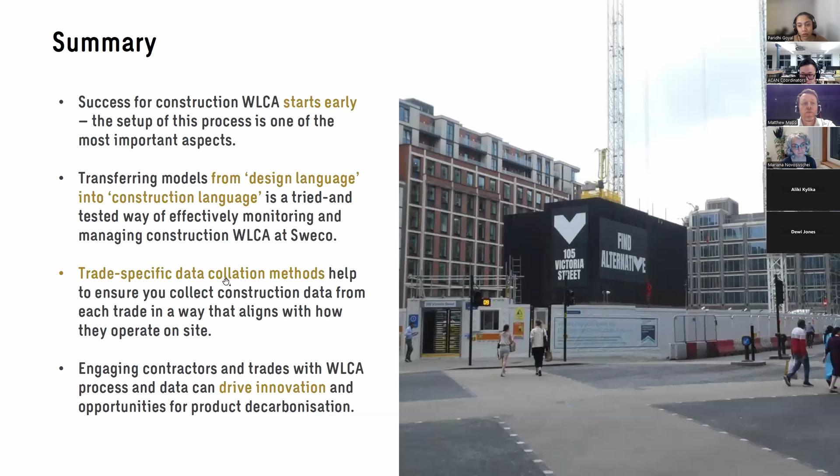And then engaging contractors and trades with that process does drive innovation, even in difficult parts of the carbon assessment like MEP. Don't be disheartened by people saying there's not enough information, there's not enough stuff out there. Ask the questions, put stuff forwards, learn to work with people in the way that they work, and that stuff starts to come out of the woodwork. And the more we do that, the better it will be for delivering low carbon products and low carbon buildings. Thank you very much for your time.